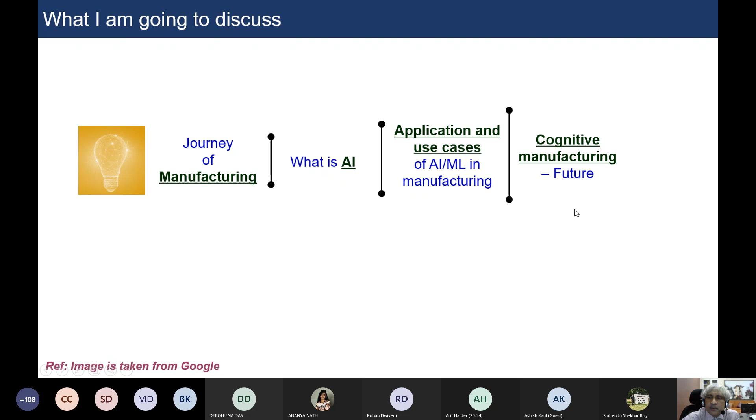I'll also discuss what Deboleena mentioned, the Center of Excellence in Advanced Manufacturing Technology, which is DHI sponsored, and it is an ecosystem between industry and academia. We have a large number of industries present in the Center of Excellence doing projects with us. So I'll also introduce the Center of Excellence in Advanced Manufacturing Technology and the research activities there.

When I describe the importance of AI/ML in manufacturing, I'll also talk about some use cases, since some of you are already doing projects on AI/ML algorithms or concepts. You'll find how those concepts can be implemented in the manufacturing domain. So briefly, this should create an awareness of AI/ML for manufacturing.

Now let us look into the journey of manufacturing. Manufacturing started long back in the prehistoric era, in the Stone Age. At that time, people used to use stone as the cutting tool, and stone was used for different purposes.

So they got the idea what should be the shape of the stone and how that stone could be used for different purposes. During that period, people used stone as the cutting tool.

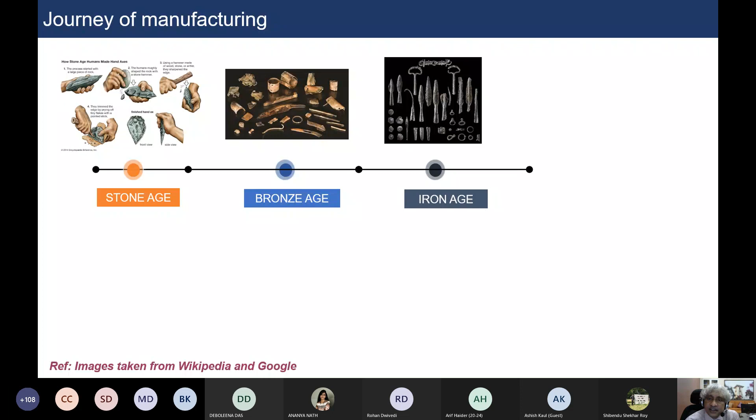Then came the machine age, where different types of motion and directions of motion were achieved through mechanisms. Then people thought about how to run those mechanisms and what should power them, and with that, the advent of steam, Industry 1.0 came up.

Then, with the use of electricity in the manufacturing shop floor, Industry 2.0 came up, followed by Industry 3.0, and then Industry 4.0 came up.

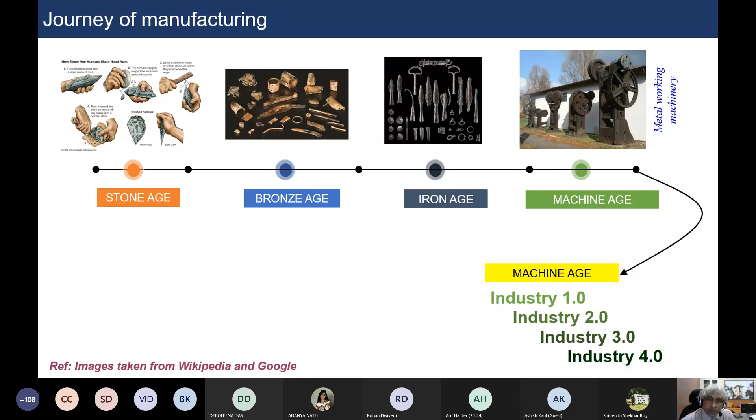Let's quickly look into what Industry 1.0, 2.0, 3.0, and 4.0 are. As I mentioned, when steam got used to power mechanisms, manufacturing became a bit easier compared to the machine age.

But steam had its own problem - steam cannot be transported from one location to another. It's very difficult, so manufacturing remained very much localized.

Then with the advent of electric energy, electricity could be transported from one location to another, and the same type of job could be produced at different locations. That means a company could have one unit at Durgapur and another at Kharagpur, simultaneously producing the same type of jobs through the supply of electricity. So mass production was very useful in the era of Industry 2.0.

In Industry 3.0, we find a lot of usage of computers and robots. Automation was very much present in Industry 3.0.

But even though automation, robots, and computers were there, it didn't flourish much because the cost of the computer was very high. The robot was also highly programmed and its cost was also very high, so this automation didn't flourish the way people wanted.

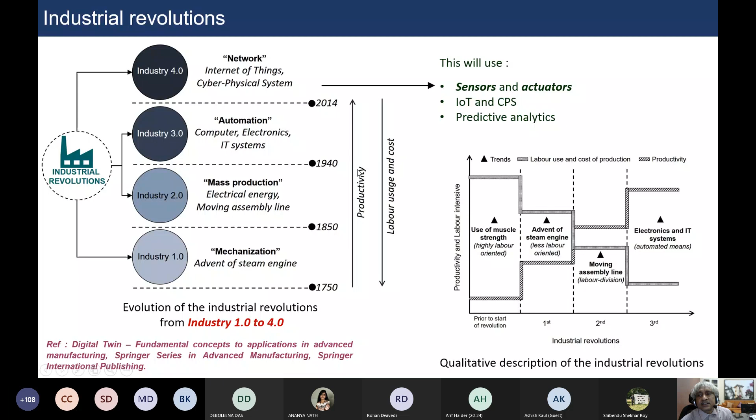So the productivity is increasing, labor usage is going down, and the cost of the product is also going down as we move from Industry 1.0 to 2.0 to 3.0 to 4.0. As productivity increases, labor use is coming down - whether that's good or bad can be discussed and debated later. And the cost of production is also going down.

Now let us quickly look - since this is manufacturing, and I understand a large number of participants are in the field of mechanical and manufacturing, but it doesn't matter even if you are not in manufacturing. These examples are very lucid, one can very easily perceive and understand.

If you look into this foot-driven machining operation, that means the mechanism was powered by human labor - powered by human foot. Because of this simple mechanism, you can rotate the job, move the cutting tool over the job, and remove the excess material to give a definite shape.

But it was purely human powered and purely human labor. That means it was giving some advantages over the previous era, but it also had some difficulties. If you want to machine a heavy material, that was not possible - it was posing difficulty. Metal cutting was not possible because you need to exert more force, and the accuracy of the product - if you go for repeatability, or want to produce the same type of product - that was also very difficult using this mechanism.

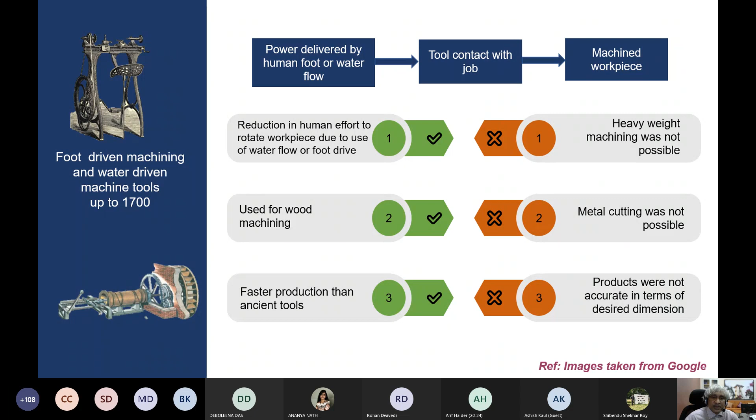Then steam was used - because of steam, we can rotate the job much faster, meaning you can remove more material. Productivity got increased. But again at this stage, it was very difficult to produce complex geometry, because the removal of excess material from the blank is purely governed by human labor.

Then with electricity, as I mentioned, easy transportation meant productivity increases, but it was not fully automated. The human labor was still very much needed - what should be the tool movement, how much depth the tool has to have to remove the excess material. All these things are governed by human labor.

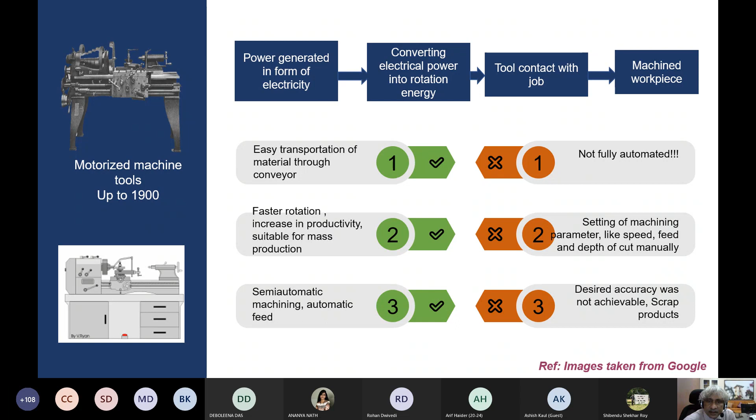Then the concept of NC or CNC - numerical control or computerized numerical control - came up. This concept gave a lot of hope towards repeatability, because the execution of operations - how the tool should move, what should be its speed, how the job should rotate - all these things can be done through programming.

Before you execute the job, you can do the programming. You can also visualize what sort of job is going to be produced. So repeatability, which was a major concern previously, now got solved. That means productivity also increases.

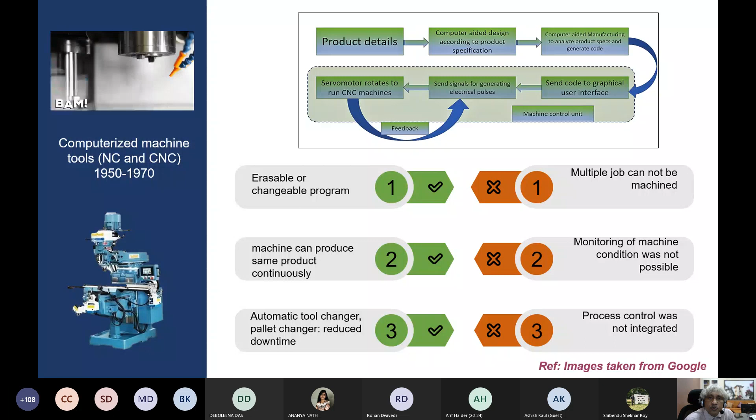But today, even having so many advanced CNC machines, it is not fully autonomous. Even doing multiple types of jobs at the same time is becoming very difficult. We need to understand that when a job is being produced, we have to acquire information out of that system - like what is the condition of the cutting tool, what surface roughness it is producing. So constantly you have to acquire information out of that system.

Today we are standing at an era like Industry 4.0, where a large number of sensors can be integrated onto the system. When I talk about the system, I include the machine, and it also includes the process it is executing - that means what is the surface roughness, what is the condition of the cutting tool, how much vibration we are experiencing because of a new process parameter, what is the power consumption.

So lots of information you are going to get. When you have too many pieces of information, that means you are going to have more and better insight about the problem. When you have better insight, you can do optimization and make proper utilization of the machine or system. You get to know how the system is behaving, how the machine is behaving, and accordingly you can predict what would be its remaining useful life.

Every stage we have discussed, from the Stone Age to Bronze Age to Iron Age to Machine Age to Industry 1.0, 2.0, 3.0, and 4.0, the concern was to increase productivity, have more accuracy, precision, and consistency in quality, and low production cost. Because in manufacturing, the product has to be cheaper, the process has to be faster, and the product has to be better.

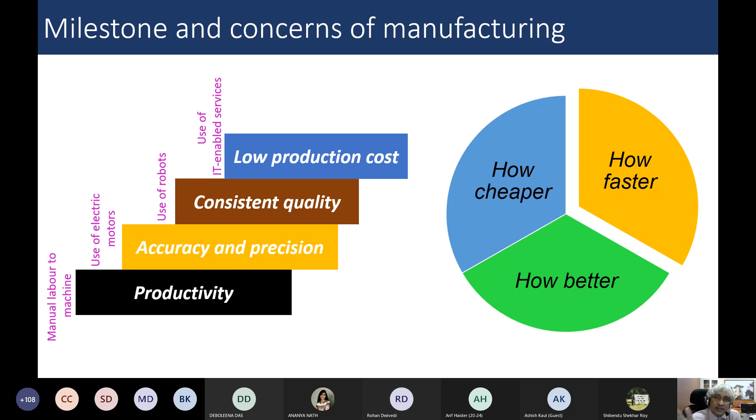That's why the fourth revolution gives us hope that because of the attributes of the modules of Industry 4.0, we can have a better day tomorrow. A lot of modules are there—I'm not going to discuss all of them, and I'm sure you've heard terms like cloud computing, cyber physical systems, big data, simulation, Internet of Things, augmented reality, robotics, additive manufacturing, cyber security, and system integration. Here there are 10 modules.

Some people claim there are 9 modules, since some of the modules are split over here. Some comment that Industry 4.0 is just a flashy catchphrase, but I don't think in that way.

If you are really able to implement these concepts in the manufacturing domain, you will have a complete see-through understanding of the system. Once you have that, as I mentioned, you can make products smarter—something is going to happen with this product, something is happening in the market. If the market demand changes, how can I quickly adapt myself to produce a different job and meet that market demand?

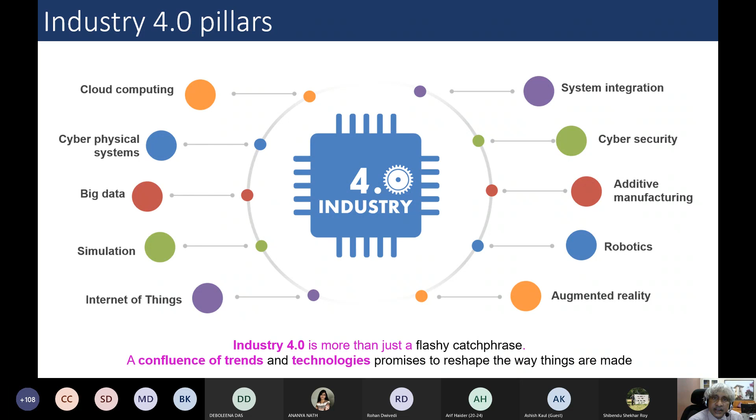The robot is very much needed for this automation. If you look at the usage of labor, it has very high flexibility—if an unforeseen situation comes up, the human brain is supreme. Human behavior and the brain can solve unforeseen situations, but human labor has limited productivity.

Then people thought of completely replacing human labor with robots—you can have higher productivity, but it will have limited flexibility, because today the robot is not capable of tackling unforeseen situations. It can identify the best solution, but if something happens while executing that solution or algorithm, it is very difficult to apply human cognizance.

That's why people are thinking we must use the robot, but in conjunction with human labor or the operator. In this way, flexibility comes from the human mind, and productivity comes from the repeated, untiring working of the robots over a longer time.

If you look at manual operation: less productivity, higher rejection, and human involved. For the industrial robot: high productivity but no intelligence—it is programmed, so it executes that program repeatedly in a nice way, but if something unexpected happens, it doesn't know how to solve it. So there's no human involvement, and if human intervention is introduced, production will stop.

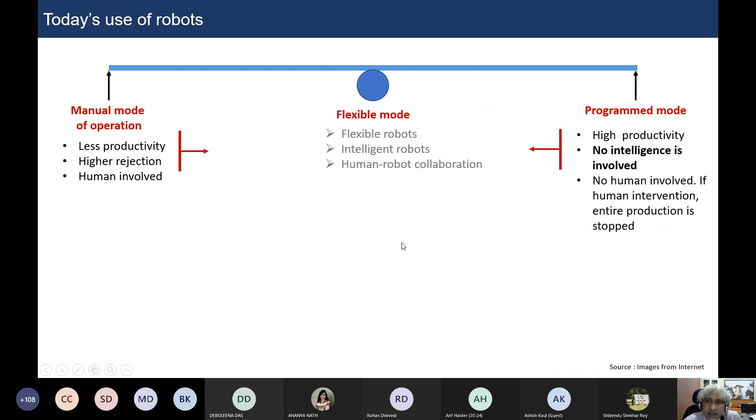So the balance is a flexible mode, where the presence of the human being should be there along with robotic use—robots should work in conjunction with the human being. In that way, it gives you the true sense of collaboration.

Now people also talk about collaboration—robot to robot collaboration and robot to human collaboration. For all these collaborations, we must understand how the collaboration would be, whether it would be in the form of coexistence, where both the human and robot share the same workspace but do not interact.

I'm giving an example. I've also given these examples in the same course, a course on AI for manufacturing at IIT Kharagpur.

Think of a relation between a supervisor and a doctoral scholar. If a scholar is working in the lab and the supervisor is there, but the scholar doesn't interact with the supervisor, and the supervisor also doesn't know what the scholar is doing, they are working in the same lab but not interacting. This is called coexistence.

Now, the scholar is somehow afraid of the supervisor, and the supervisor also doesn't like that scholar. So when the supervisor is going, the scholar is not there, and when the scholar is going, the supervisor is not there. This is called synchronization—they are working in the same environment, but at different time frames.

An ideal scholar-supervisor relationship is one having true collaboration, meaning both the scholar and the supervisor are working together at the same time, in the same space, sharing that knowledge and sharing their duties and work.

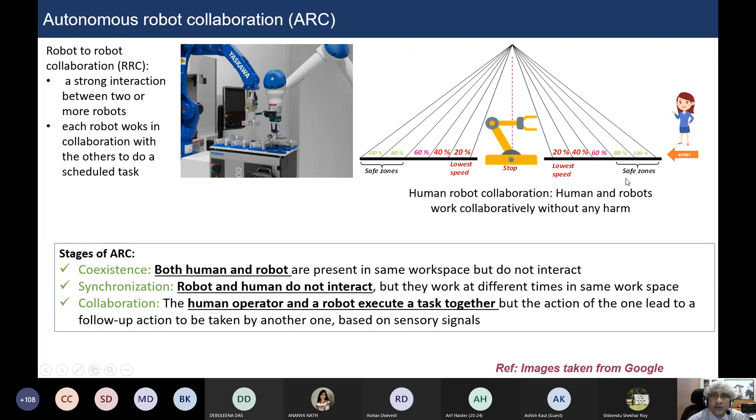But if we can solve these problems, there will be a lot of advantages in the manufacturing domain. I'm giving you some examples—you all know, you've seen on YouTube, in movies and elsewhere.

Some examples of autonomous robotic collaboration show, for different applications, the usage of image processing, and the usage of different machine learning or deep learning algorithms—how the two systems can work together and how they can solve unforeseen situations.

Another concept is coming up—well, it's not really new, it's very much there in the era of Industry 4.0, where we have so much implementation of IoT, the Internet of Things. Different types of commodities are connected to the internet, sharing data—we call this the Industrial Internet of Things, IIoT. We also use the concepts of big data, cloud computing, simulations, and everything.

So why can't we create a twin of the system? Can we not create the exact replica of physical systems? We all know in the case of biological twins, when a fertilized egg splits into two cells, they have the same DNA code—meaning they are not only looking the same, their characteristics are also the same. There are lots of examples of identical twins.

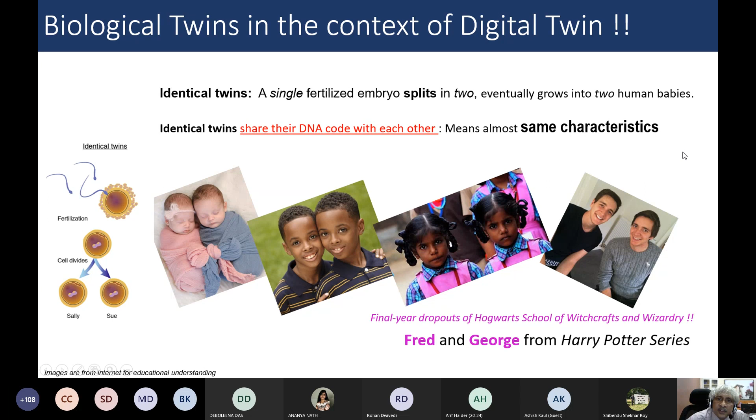The question coming up in the manufacturing domain is: can we create identical twins of the physical system, which we call the digital twin, having the same characteristics? This means if we have a real space—a physical asset, which could be a machine or a component, or a shop floor where, along with the machine, we also have the presence of the human being.

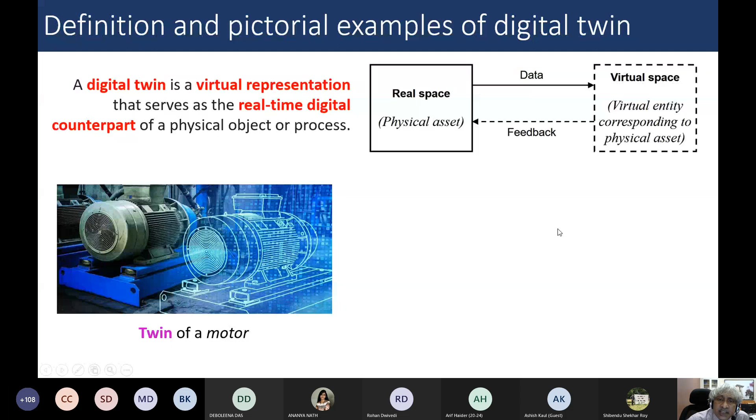If we can constantly acquire the data, we can create a virtual model in different forms—it could be a data-driven model, a physics-based model, or a combination of both, which we call a hybrid model. So it's the constant acquisition of data from the physical systems and developing an AI/ML model for predicting the system's behavior.

Here is an example of a twin of a motor. We have a physical system, and we have created a virtual motor. It not only looks the same as the physical motor, the functionality is also portrayed—meaning inside the motor there are several components, and how those components operate when the process parameters are changed.

Every phenomena is getting portrayed or predicted in the virtual model. In that case, you can come up with some unforeseen situation. Let's say the motor was running at 1800 RPM, and I would like to run the motor at 3000 RPM to see how much temperature is getting generated inside the motor, how much vibration it is producing, and whether the bearings are okay or not.

I cannot do it on the physical system, because if I do it, it may fail. If it fails, that means there will be a breakdown in the system. So if I want to optimize the process, I need to do a lot of experimentation on physical systems, which is very costly, and sometimes it brings catastrophe into the system.

So if I can create an absolute identical virtual representation of the physical system, then I can get the behavior of the physical system in real time, and that is called the digital twin. The digital twin works not only on real-time data, the present data, but also on past, historic data. Based on the combination of historic information and present day status, the machine performance can be predicted for the future.

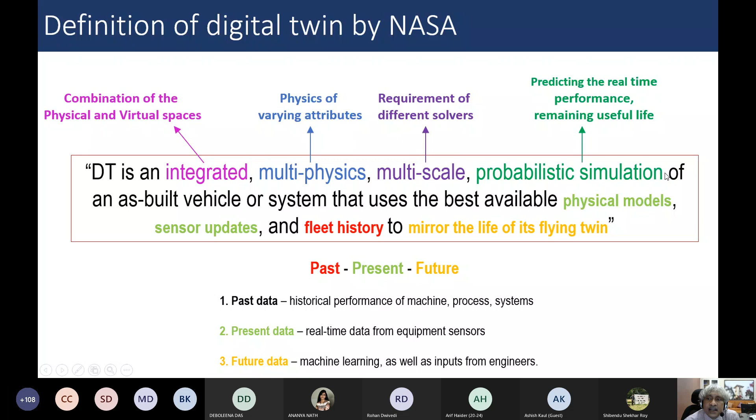So having all these bulleted questions answered, you can have a very good simulation of the physical system, which will then be able to predict the remaining useful life of the motor.

So I'm giving an example of the digital twin for the CNC machine. Let's say you do have a physical system where I have engaged different types of sensors: force, speed, position, temperature, vibration, and current. We can have these sensors engaged at different locations, and we can have some information.

You can also develop the ML models. You can predict the job quality based on this. You can predict what is the condition of the cutting tool. But it's very difficult to predict what is the wear model inside the gears inside the motors.

It's very difficult to predict how much heat is getting generated at the different components, how much vibration is getting generated at the individual level, because placing the vibration sensor at different locations is not an easy job. Sometimes it is not possible as well. You can have the overall gross vibration, but checking the vibration at each and every point is very difficult.

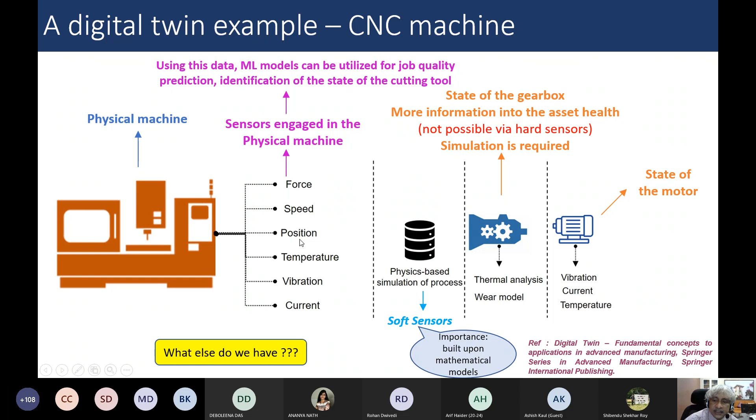You can also identify or simulate the state of the motor well if we are having both the data-driven model and the physics-based model.

So the benefits of the digital twin is that it is constantly monitoring the physical system, and based on the data you are evaluating, you are doing the optimization of the process parameters. Based on these three important features, you can also do the risk management.

So I have given an example that if a motor is scheduled to run only at 1800 RPM, what would be the fate of the motor if I make it run at 3000 RPM?

So whether some problem would be there or not - these things can be very easily identified or deciphered if I develop a digital twin model. And on top of that, you can give training. So that's why the digital twin of the physical system - if you would like to give training on the CNC machine, you create a digital twin and give the training.

to the person who is sitting at a remote place. That means if I can create a proper digital twin at IIT Kharagpur on the CNC machine, you all can have the performance of the CNC machine itself and see what type of job it is producing, sitting at Durgapur. So if you analyze and apply your common sense to these 3 points - monitoring, evaluation, optimization - then you'll get to know that you are going to have a proper judgment of the equipment.

So, what was my health condition previously, what is my health condition today? If we know all the prehistoric data, historic data, and today's present data, you get to know at least an idea of what would be my health condition tomorrow. So productivity can also be improved, you can reduce the risk, and maintenance cost can also be reduced because the breakdown phenomena can also be predicted. So a lot of advantages are there by developing the digital twin.

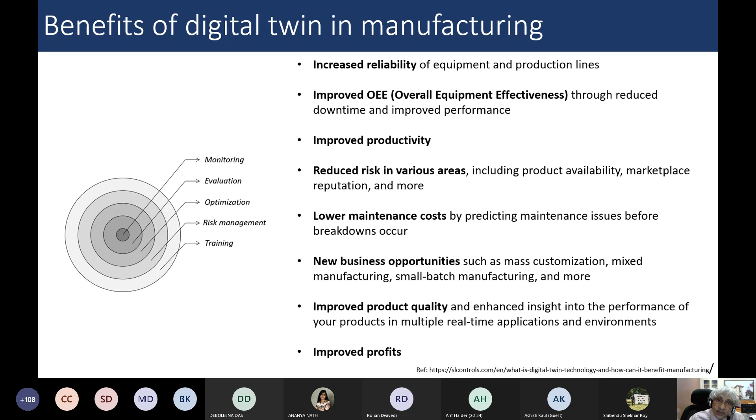So the other aspect is cloud computing of Industry 4.0, because a large number of sensors are used on the machine, on a single machine. But think of that - you'd like to have the complete picture of the shop floor. Different types of machines are there. Performance of one machine influences the activity of the next machine. So that means data has to be transferred from one machine to the other machine.

Not only the machine, but other utilities of other units should be there. The human presence of the operator will also be there - how do the operators interact? So collecting information from different locations is very much needed. It's a huge volume of data, and you need to process the data in real time. So you have to keep on harping on the cloud computing concept, or the fog computing concept, or the edge computing concept. We have done some case studies on edge computing and cloud computing as well.

As I mentioned, a large number of data is coming up, and of course the data is not all the same type. That means some is sensor data, structured data; some is optical images, unstructured data. Some data would be in the form of an email, some in the form of a PDF. So different types of data, different volumes of data, different speeds at which data is coming across - from the operator, to the machine - and on top of that, what is the authenticity of the data? That means uncertainty of the data. So these 4 V's play an important role in manufacturing, in Industry 4.0, when you tackle the manufacturing aspects.

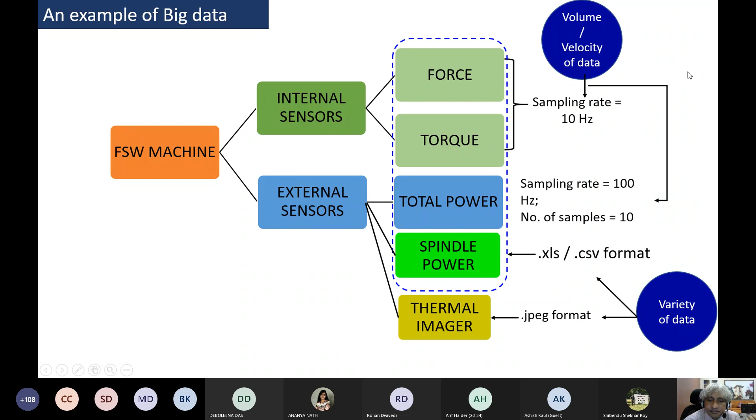I've mentioned that different types of sensors are needed, the soft sensors and the hard sensors. The sensors I've mentioned, like force, torque, power, speed, these are giving you direct information from the system itself, so they are hard sensors. At the same time, the hard sensors are not sufficient enough, so you need to do simulations.

The simulation model will give you the soft sensing. So how to come up with the hybrid knowledge to have the proper understanding, so that you can make the reasoning, which is very crucial, because reasoning is lacking today in the artificial intelligence model, and that's why people are thinking about cognitive approaches and all.

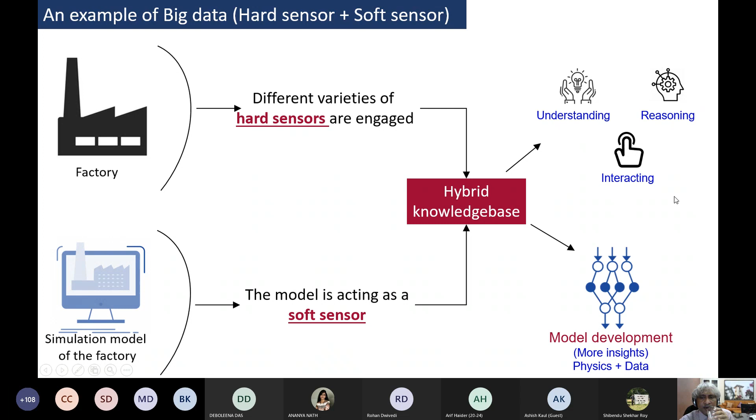So we did some work on the hybrid model of the digital twin, which is based on sensor data as well as simulation data. Real-time sensor data is collected, and the process is also simulated. So we know the stress strain at each and every point inside the material during the execution of the work. At the same time, we know the overall force variance and the power consumption.

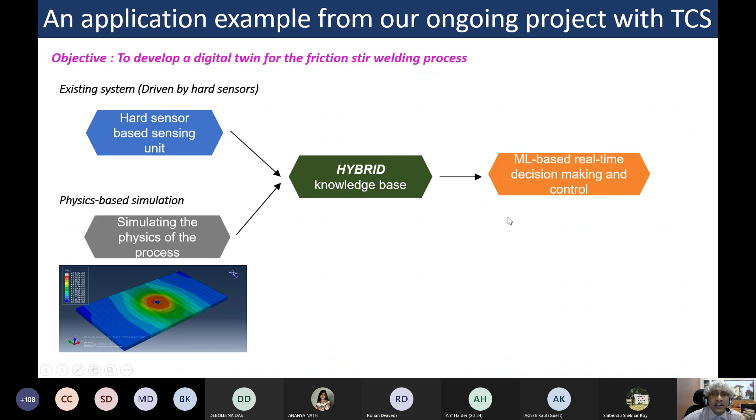So the simulation model and the sensing model are clubbed together to give you the hybrid knowledge base, and that knowledge base is used for prediction purposes using different types of AI, ML, DL models. This we have done with Tata Consultancy Services, and it's about to be filed as a patent.

Now, when you talk about automation today, where we stand and what we need, we find that we are really lacking intelligence. The system that we have so far, the robots in Industry 3.0, they were highly programmed, meaning they can execute the same operation repeatedly using the PLC and a few sensors.

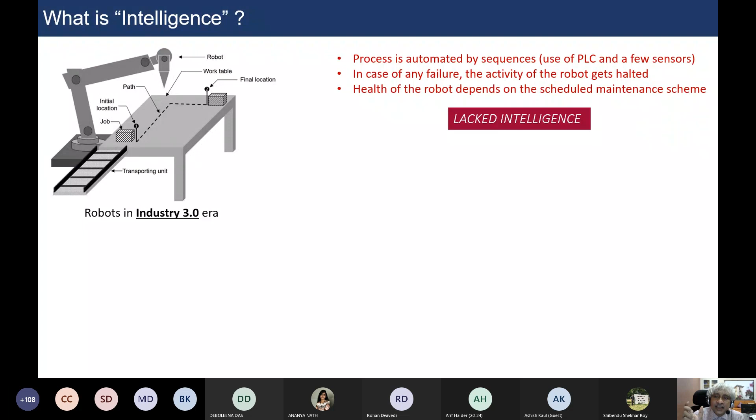But it doesn't know how, if any failure comes up, the entire shop floor activity can be optimized. So that's the real concern, and that's why I call today's automation really lacking the intelligence level. So in order to make the system intelligent, data has to be constantly acquired, analyzed, processed, and predicted.

I'm giving an example: a robot is working to pick up a job from one place and is scheduled to place the job in another location. But if some obstacles come up dynamically, how are you going to solve that? How should the robot find different possible paths and finally reach the destination?

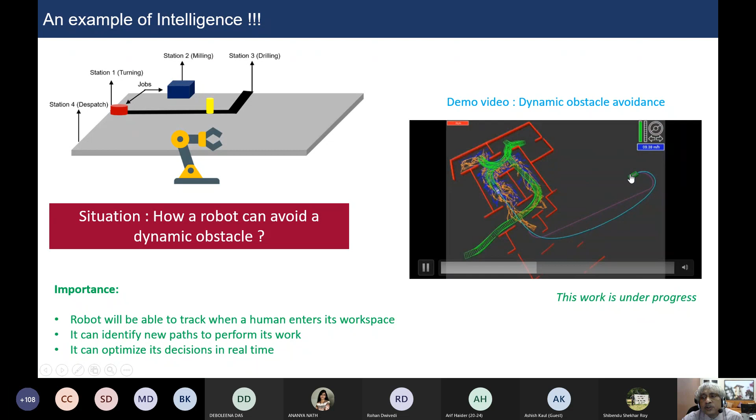We have done some work on this aspect, dynamic obstacle avoidance. It has been successfully simulated, finding different possible paths, and from there coming up with the shortest path, and reaching the destination.

But if you look into present-day artificial intelligence and compare it with human intelligence, we human beings do have different sensors. We get information through the sensors, and then that information is processed in the brain, and that's why we can encounter unforeseen situations.

But if we think about today's AI model, we are also using different types of sensors, capturing information, developing the AI model trying to mimic the human brain, but still we are unable to tackle unforeseen situations.

What this means is that the models we are developing, the artificial intelligence models, are not able to capture the complete behavior of a human being. So in a completely new situation, how the human being will operate, or what sort of reasoning the human being will be able to gauge, that is not possible today by the AI method.

I'll give you an example. Like if there is a party going on and a lot of kids are there, and cake cutting is going on, and all the kids are wearing caps, balloons are there, everything is there - it's just like a birthday party.

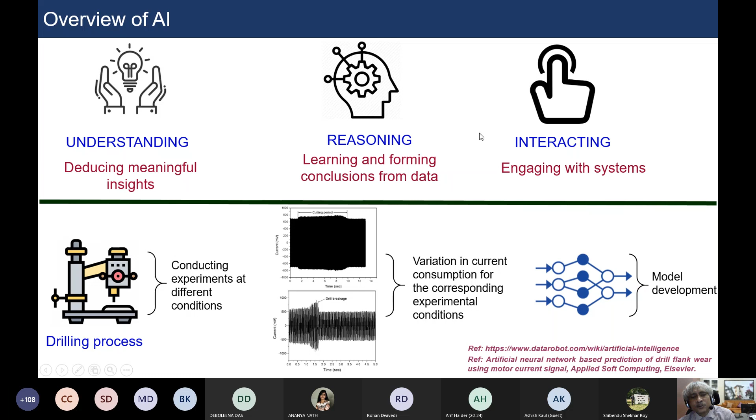I'm not going into the manufacturing model itself since that has already been explained. There's a need for whatever AI we have to be easily deployed in different manufacturing domains. We searched a lot at our Center of Excellence, where we have a large number of doctoral scholars and interns from different institutes, including NIT Durgapur. We identify different types of industrial problems and see how those problems can be solved.

We are not developers of AI/ML models. We just make use of AI/ML models, making small changes in the algorithms, but we'd like to use those algorithms effectively so we can reach the industry. That's the purpose of our Center of Excellence.

We found that AI can be easily implemented in quality inspections and machine vision systems. It can be used for predictive maintenance, and for coming up with possible alternative designs of your product - meaning you can generate new designs. You can create a complete digital replica of the physical system, that is, digital twins. You can also make robots autonomous by putting a little cognizance into robotic behavior.

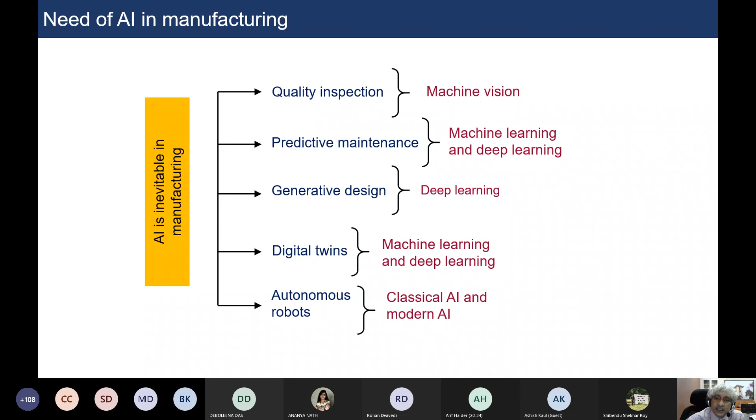We can also gauge handwriting, what has been written and so on. So natural language processing, NLP, has also been very useful.

We can also find out the human ability to see and analyze. I do not know how much analysis is possible apart from the gross information that is visible on images, but that much analysis we can achieve.

If we are given two look-alike products, almost the same, you can identify they are look-alike, but there is a slight difference in the dimensions of these two products. We are presently working on such problems for Tata Motors and others. It's very interesting that all dimensions are the same, but there's a subtle difference. So you need to identify that region, focus on it, apply the AI model, and then find out how much the difference is.

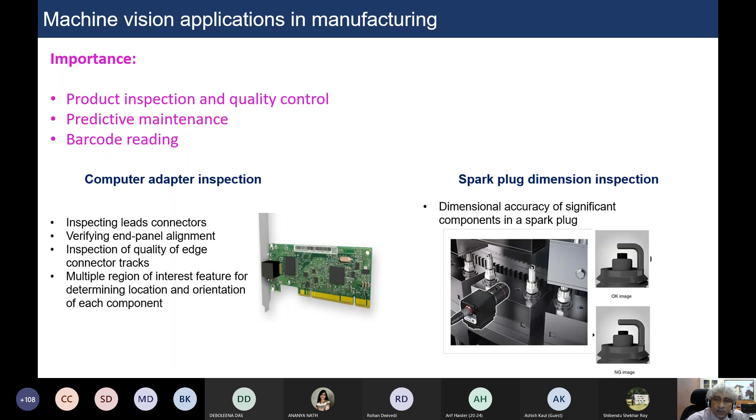Another model I'm going to present is by Sukriti, a friend from NIT Durgapur. She is working with us on identifying the fuse box in an automobile car. Each and every car has a definite fuse box. So from the fuse box, can I identify which car it is? Can I identify what sort of fuses are in place?

How many fuses are there? Whether the proper fuse has been placed at the proper location, and all.

She has worked since March with us on different deep learning methods, and I'm told that today the accuracy is 100% using the YOLO model. That means this model can now be very easily deployable for the automobile industry.

So now we'll reach out to the industries. She is also preparing a proper graphical user interface so that industry people can use the demo version. A lot of other features can be very easily identified during the assembly operation.

Now whatever is there is fine, we should be happy with that. But still I would say that today's scenario is that it's very much weak. The artificial intelligence is very much weak.

If you look into computer games, the AlphaGo - it's a board game, and the AlphaGo is a computer program. That means it has been made by human beings, and now it can defeat human beings. The higher version is AlphaZero.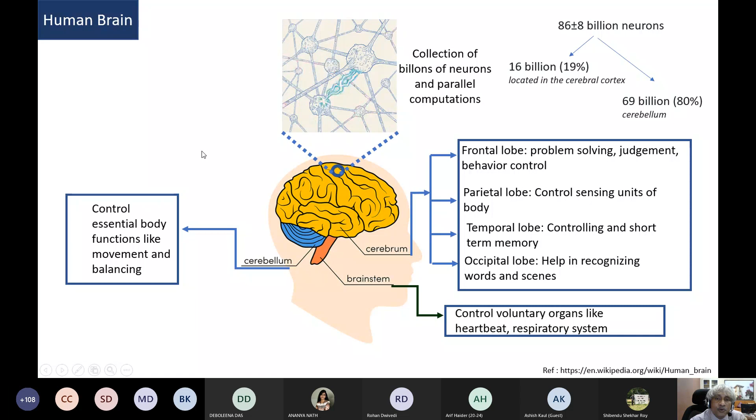Human beings have a large number of neurons, and each neuron is connected to other neurons - a lot of connectivity is there. That means sharing information and parallel processing is very much possible in the human brain. So the frontal lobe can interact with the operations of the parietal lobe, the temporal lobe, and the occipital lobe, and get to know a very good model which can tackle unforeseen situations.

This is also very interesting. I was reading one paper on brain science and AI, and I found that this information would be useful. That's why I copied it from there.

You see, we are neuroscience people. Neuroscience, computer science, and the cognitive domain - they should work very much together. Human behavior, human brain, and the algorithm developer - computer science must work with cognitive science people, must work with neuroscience people, so that the models developed can be deployed by manufacturing people into various domains. Then only can we dream of building a machine which can think like a human being.

If the brain's different regions can be examined - people have examined them using microscopes - that gave the neural connectivity. Then the artificial neural network model was developed by computer science people, and today we are using that artificial neural network model for various types of process monitoring.

You can use the electronic detector. The convolution architecture, deep architecture, is revealed now. So CNN has been developed, mimicking the convolution architecture or deep architecture of the human brain, and that is having a strong presence in image analysis or quality assurance.

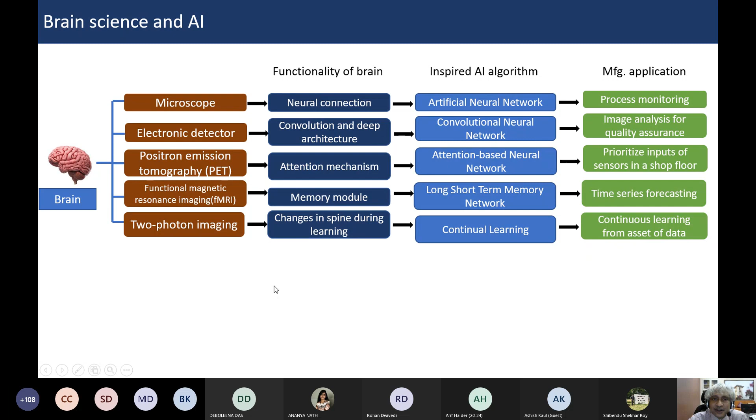A lot of explorations have to be made on the brain structure. We have just revealed a tiny part of the brain. That's why if we can have a complete understanding...

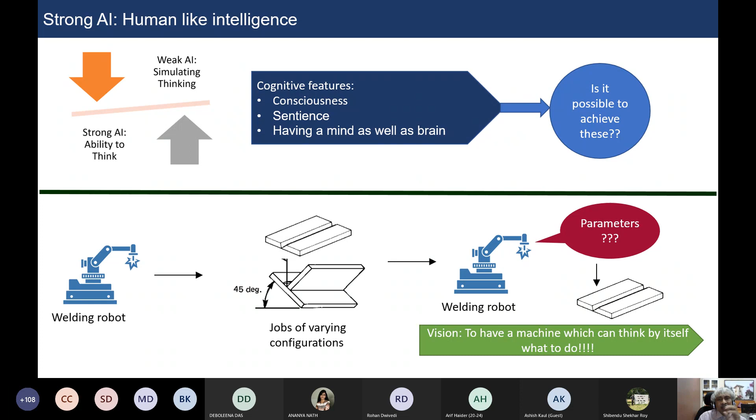Involving cognitive features like consciousness, like sentience, emotion - if you can club both the mind, that is the behavior, and also the brain, its computational aspects - if you can merge both together, then there is hope of building a machine behaving like a human being.

The present scenario is that AI-based object recognition and material handling is very much possible, but we are not very much smart as of now to handle the collaborative aspects of the job. Machine health prediction is possible, but self-learning is not there. If something is happening, the machine is unable to learn out of that system. So toolpath optimization and all these things are possible, but a lot of miles we need to travel in future so that we can do something towards cognitive intelligence.

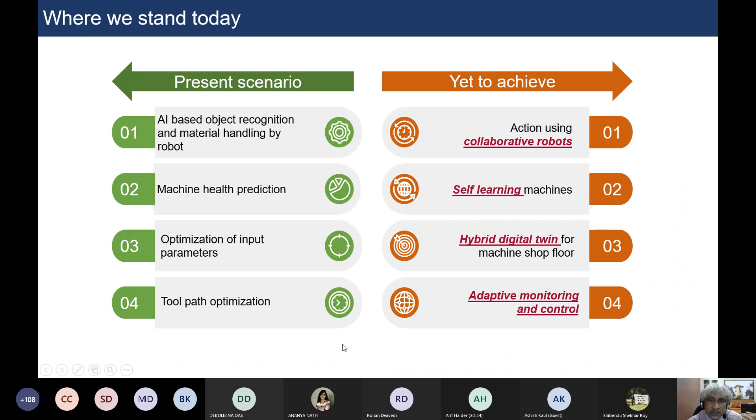I'll give you some examples of AI in manufacturing, quickly browse through, so it will give you some idea, because these are application cases we have after a tremendous survey. We identified every domain of manufacturing, starting from casting, forming, machining, welding, additive manufacturing, and the overall complete manufacturing feature which is the supply chain.

And everywhere we find there is tremendous scope of AI in machining. You can monitor the real-time state of the cutting tool, because if you can monitor the health of the cutting tool, then you can ensure job quality. You can also monitor the health of the gears. If there is no missing teeth between the two mating gears, then you can ensure smooth power transmission and all. So the surface roughness of the product can also be identified.

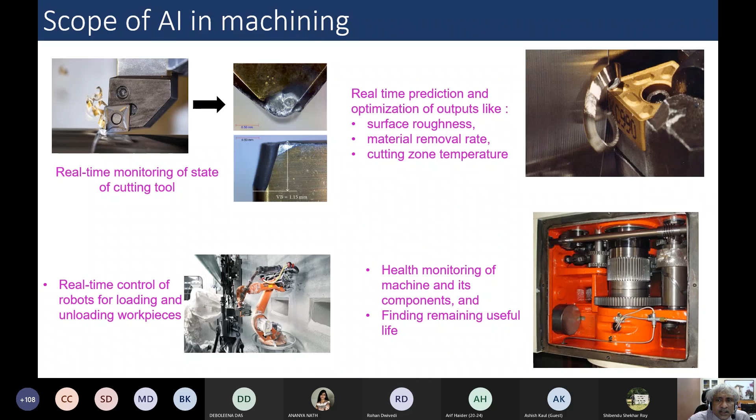The defect in the cast product can be very easily identified by using image processing and all, during the casting process itself, observing how the solidification is taking place. From that, if you can identify the solidification process and mimic it properly, then you can optimize the process parameters in real time to get rid of the defect.

We have done some similar work in the field of welding, for real-time defect control. I'll also show that one.

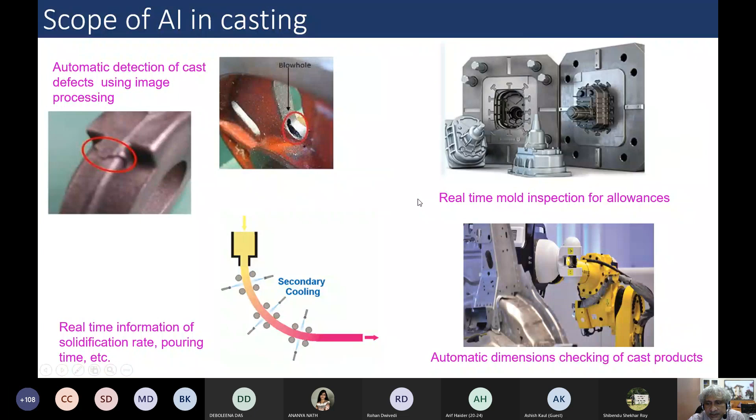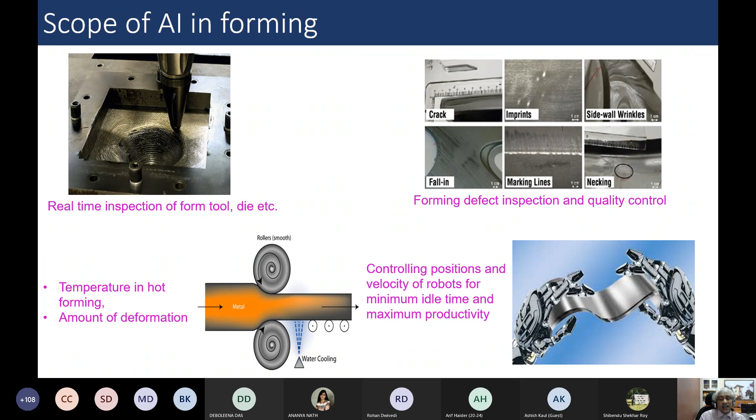Similarly, AI in forming - a lot of defects we do observe. In steel rolling, how the product is deformed by the counter-rotating rollers, and whether there is elastic deformation taking place on the roller or not. If the deformation takes place, then the job quality will not be properly ensured. Also, material handling concepts for two-product handling can be very easily solved by collaborative robots and all. So a lot of applications are there in the field of forming.

Similarly, for welding, you can find out the defect. You can also find out the seam, because seam tracking is a real concern for any industry, because when welding is getting done, there is a huge arc, and it's very difficult for the operator to check what is the weld line or the proper seam. So if AI can be engaged, proper image processing can be done so that the intensity of the arc can be reduced, and then the human operator can see the weld line properly, and welding can be done in a nice way.

As of now, in most cases - recently I visited one organization whose job is purely cutting and welding, and there is no automation. Every welding is getting done by the operator, mostly MIG welding process. How do they solve this? They solve it purely by muscle memory.

Muscle memory means you are not looking at the line - your hand movement has been done the same way for several times, even for months together. So the hand moves in the same path. Just like when you type, these days we don't look at the keyboard - our finger automatically goes to the proper place. That's called muscle memory. So the welding is getting done purely by the memory of the movement of the limb. But it may happen that sometimes that creates problems during welding.

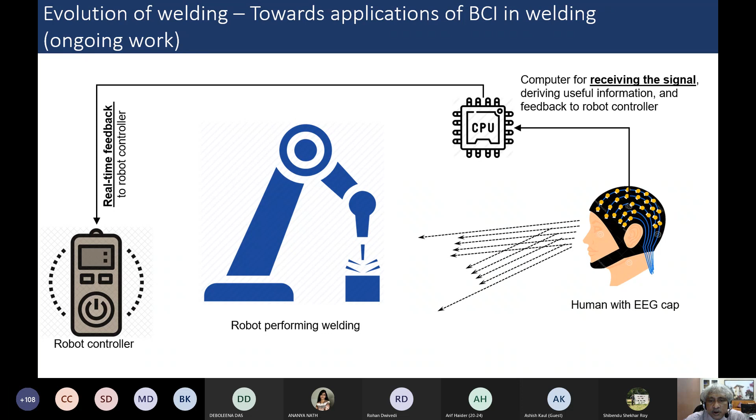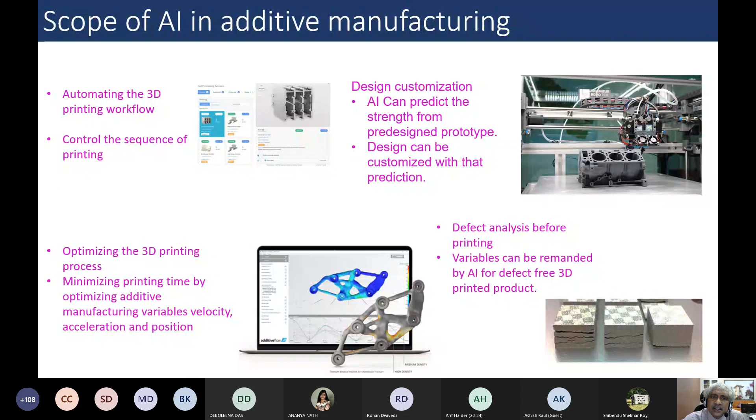So for additive manufacturing, I'm not going into the other areas of manufacturing. Any manufacturing process, be it casting, forming, additive manufacturing, even supply chain - there's a lot of scope for AI implementation.

I would stress a little bit on the supply chain, because when you talk about supply chain, that means starting from the inventory to the exit - not just exit from the shop floor, but until it reaches the customer's hand. All this information you can capture.

How much storage do you have? How much inventory do you have? Do you have the proper inventory to tackle the present operation? If all of a sudden some demand is coming up, whether your inventory would be sufficient or not. If one process fails, how can the information be transmitted to the next process, how can the entire activity flow be optimized because of the failure at one end?

So all these optimizations can be made very easily through artificial intelligence, starting from the product design to the customer's end.

Some use cases we would like to show, because we've been working for a long time on different aspects of manufacturing, and presently, not only us but large numbers of researchers throughout the globe are working on what today is called artificial intelligence, machine learning, deep learning and all. But in the 2004 era, before that, when people used to work on this, it was named soft computing.

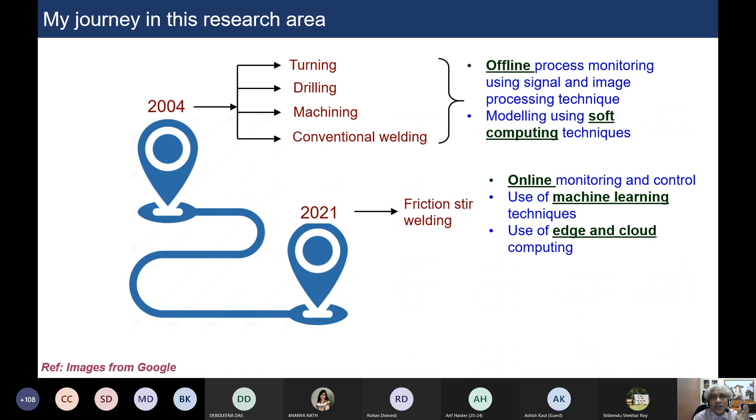Now, because of the advent of different activities portraying the brain's functions, more specifically deep learning algorithms like CNN and others, people are able to decipher more about that system. On top of that, previously the computer was not very accessible - computing power was very costly. So we could not solve, even though you have a large number of data, a large neural network structure, you cannot solve it if you have a large number of hidden layers.

Backpropagation neural network was there long back. It was a supervised learning method, and most methods are supervised learning. So today we are solving what previously we could not solve. That's why the process was restricted to simpler predictions, but the concept was very much there. That's why I call it old wine in a new bottle.

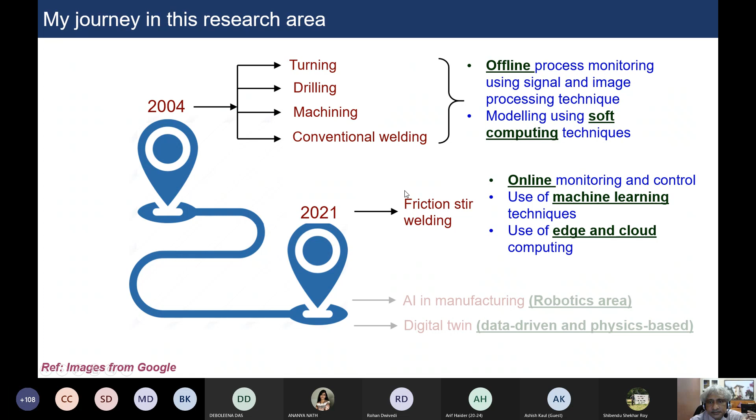So those informations will give you the quality of the weld. We captured the weld sound and did the signal processing—it's a pure time domain analysis. Kurtosis feature gave us a clear indication of how much blowhole is there, where the blowholes are, and where more deposition took place.

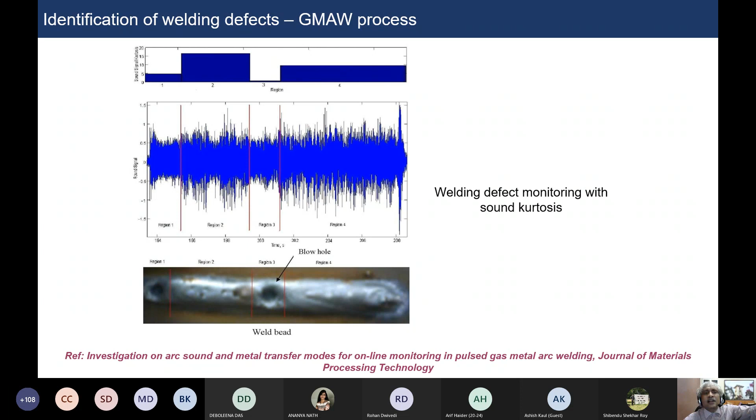But with all these algorithms, we could not give feedback to the machine, so it was an offline analysis. Even so, the analysis was strong enough that you could find out the grain size for different welding parameters. Now think about how manufacturing is so transdisciplinary, because if you can control the weld parameters, you are controlling the microstructure.

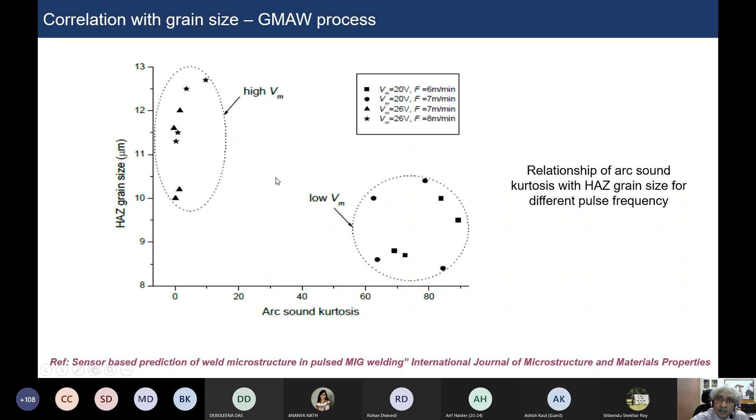That means metallurgical people are very much influenced by electrical people, and from this microstructure the ultimate strength of the product is defined, which is the concern of mechanical people. So the signal behavior feature gives a lot of information about the process characteristics.

But the concern is that you need to get the proper signal—you have to suppress the noise. The signal to noise ratio has to be very, very high. So all these features, all these things are there.

We have some real life case studies, most of which are filed as patents, where during the welding process we evaluate surface quality and change parameters in real time so that the product quality is improved. This is an example of not just real time monitoring, but real time control of the defect for friction stir welding.

That means if the welding process initially has some defect, the machine changes its parameters automatically and produces a sound weld. Now I must tell you that this information is purely based on sensor data—we have not simulated anything.

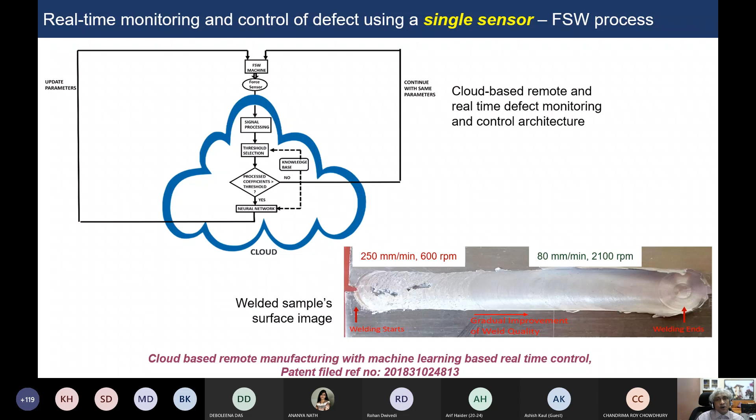Presently we are working, as I mentioned, on the hybrid digital twin with Tata Consultancy Services, where we are simulating internal features like the stress strain developed during welding. That information is clubbed with sensor data—force sensors, power sensors, and torque sensors—and then we can come up with a hybrid model to control these weld defects.

As I mentioned, we worked on defect analysis and correction in real time through image processing and other methods. If someone is interested, we can discuss this at length later on—you are most welcome to contact us.

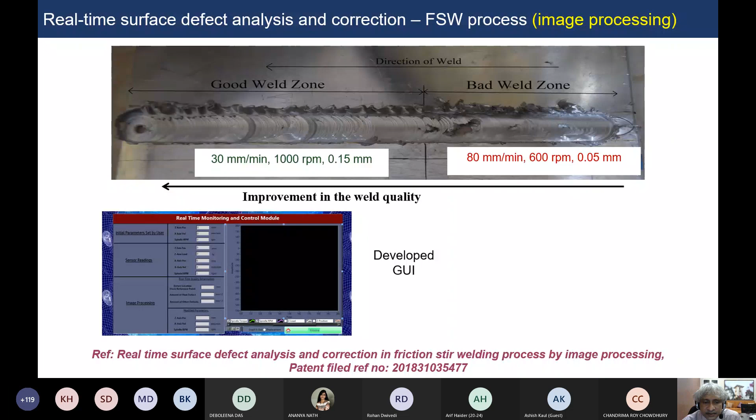So this is the present activity: how data is collected from the machine, how the ML model is created, how the decision is taken, and how we are creating the digital twin out of different components of the machine. In the friction stir welding process, we are collecting data constantly.

We analyze the data on the edge device, and if we find that the sensor's behavior or feature is deviating from the standard one, that means something is wrong. We send this information to the cloud, where another ML model runs to check how much deviation there is.

And to rectify that deviation, it determines what the process parameter should be. That information is given back to the edge device for a further check, to verify whether the prediction made by the ML model running in the cloud is proper or not. If it's a proper prediction, it passes through the limiter and is sent to the friction stir welding controller to run the machine in the prescribed format.

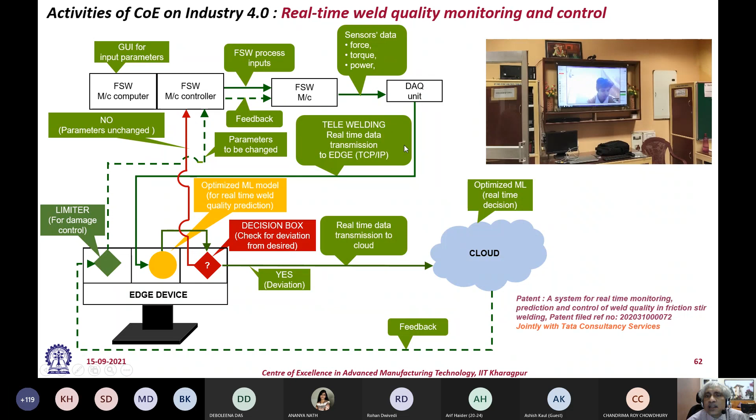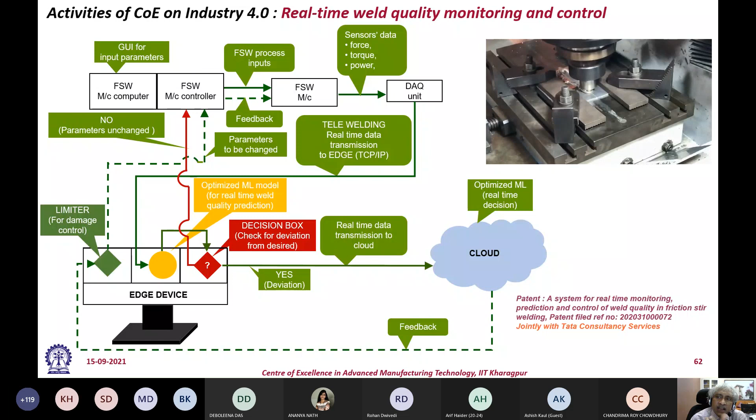Later on, you'll find that the spindle speed is rotating at a higher speed. You see a lot of cracks getting formed initially, a lot of defects coming up, and as RPM increased, the RPM became pretty fast and a defect-free product came up. We filed this as a patent, and it has given us a lot of visibility.

Now Tata Consultancy Services is looking forward to implementing this in their business model.

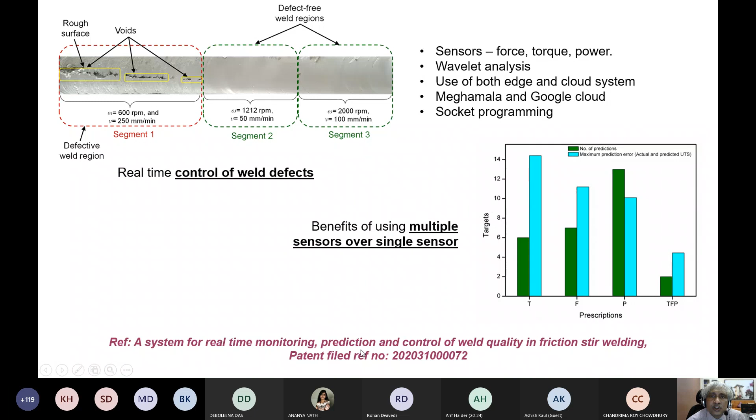So now we also worked on the big data concept - large number of data from different types of sensors - and we applied the AI/ML model. If the sensor data volume increases, the computational complexity will also increase, so there we need to do optimization, how to make it reasonably faster with gross increase in accuracy. This is low-cost based image processing, and it has given a lot of visibility to our center of excellence.

Now in case of industry, I understand some industry people are present here. When they produce the product, they just do sampling for the quality check. If you Google it, you'll find that for spot welding in automobiles, there's data from Audi that out of 1,000 cars, they only check one car for the quality of spot welds. That particular car is checked by a human being purely manually, all the spot welds made on the car. So that means 999 cars go unchecked even in a company like Audi.

So the large number of products goes unchecked. What the company wants is that every product has to be dimensionally accurate, so that it ensures high quality, and at the same time it has to have a high production rate. Now think of it - if the one car used for checking has something wrong, they are going to discard the entire 999 cars, and if it is accepted, the remaining are also accepted. That means a lot of products, even though stamped with the QC quality check green sticker, are not checked properly.

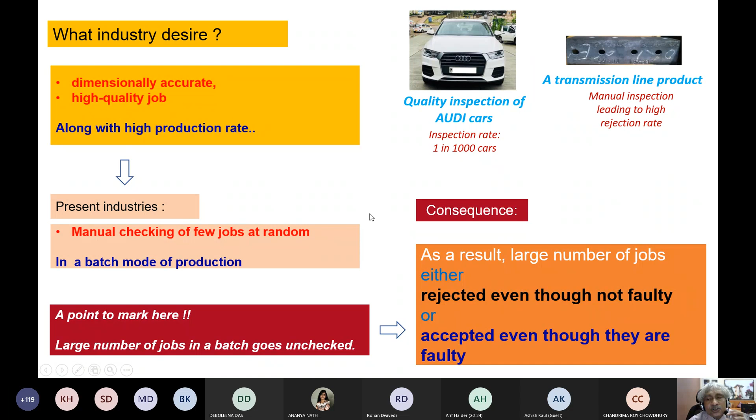So that means AI has got a strong role to check the dimensions of the product. The problem becomes very critical for MSMEs - micro, small and medium enterprises - because they do not have a quality department. If they cannot ensure their product quality, they can't be in the supply chain for big industries. Their quality has to be very good to compete in the global market, and in the Indian scenario, most MSMEs - that is the real concern, which is why they are unable to meet the global market.

So this problem was given to one of the MSMEs surrounding IIT Kharagpur, just before the lockdown, around 2nd or 3rd of February, and we did it in 1.5 months. We immediately contacted that MSME, but they didn't turn back. But we didn't stop - we thought let's go ahead with this solution. Since the product cost had to be very low, we used a webcam intentionally, to reduce infrastructural cost. And we know that by using AI methods, we can also augment image quality.

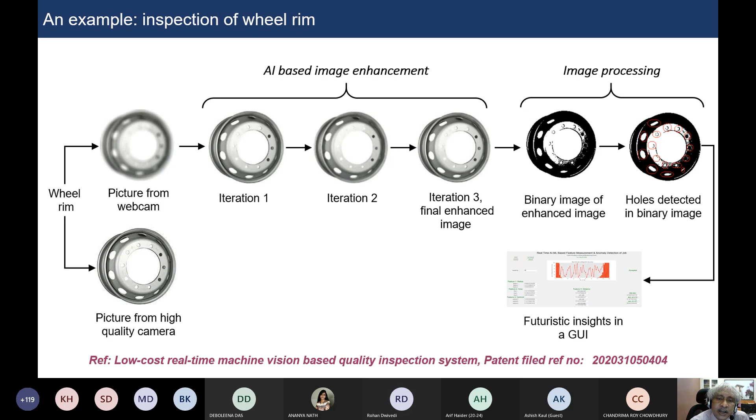So this is a wheel rim - the leftmost figure is taken by the webcam, you see the poor quality. Just below that is an image taken by a high quality camera. We worked on AI-based image augmentation, and after several iterations we got the image quality improved almost at par with the quality of the image taken by the very good camera. Then we did the processing and came up with a prediction that is 99% accurate.

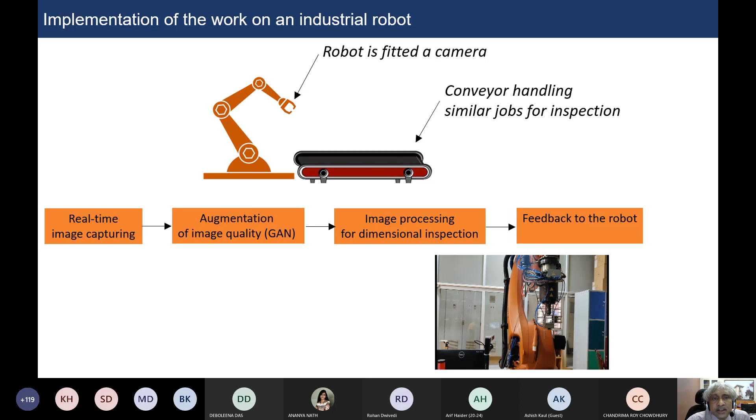I'll give you an example - this has also been filed as a patent, and it is giving a lot of visibility. This work was done by one of our interns, and based on this work, today we got a project for finding weld defects - AI-based weld defect analysis - from a very reputed government defense firm.

So you see, if products are placed and move from the conveyor belt - everything, the conveyor belt, is also fabricated by us - there is a webcam fitted onto the robot. The webcam captures the image, checks the quality, and the robot also checks the pose or orientation of the job, orients its gripper accordingly, and grips it. So a lot of ML is involved there, not only to check the product quality but also to orient the gripper to grip the object properly. This has also been filed as a patent.

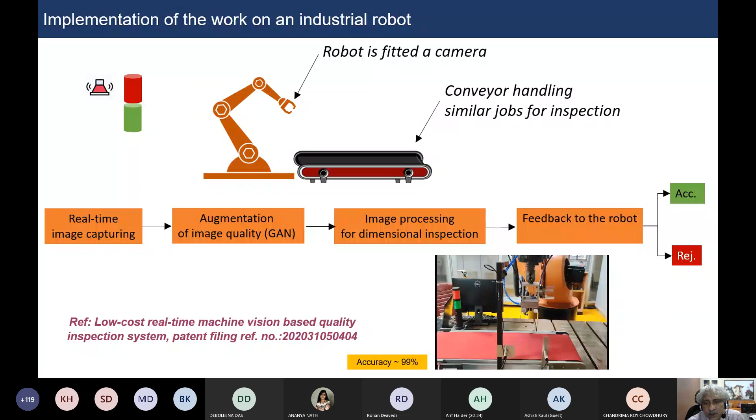This week we participated in an India-wide competition on India AI and became one of the top 3 innovators in the country for this work. We got that email today. It's giving very high accuracy. A lot of work is also done on different types of jobs, how to find the job dimension, what sort of job it is, and how to orient the gripper to grip it. We have got accuracy close to 97%.

You see our operator placing the job on the conveyor belt, and it's moving in real time. When it comes close to the robot, the robot camera's webcam captures this image and changes its orientation accordingly. It's a rectangular job. In some cases cylindrical jobs are also produced, so the robot gets to know what job is there. I think this is a cylindrical job, you see. Now the robot will change its gripper.

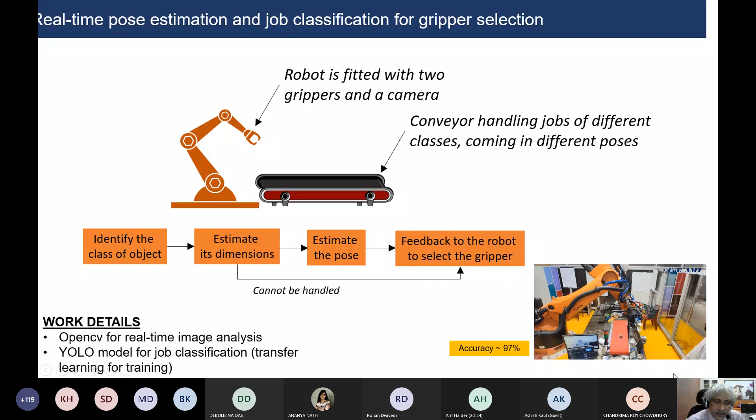This is our fixed sensor welding laboratory, industry scale welding. We have a large number of robotic facilities: MIG welding, TIG welding, spot welding. If someone is interested, you are most welcome. And then there is also obstacle avoidance, which I've already shown, how the obstacle can be avoided.

We are also developing the digital twin, but this digital twin is based on a data-driven model. That means what is the health of the electric motor, what is the condition of the bearings?

Okay, I think it's just noise.

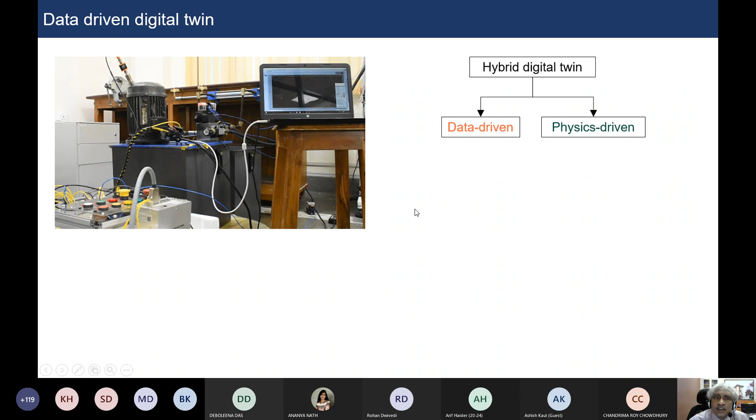So don't worry. The data which we are collecting from the electric motor, we are analyzing to check what is the bearing health of that motor. The health of the motor is decided based on different algorithms. In some cases we have got 100% accuracy based on the sensor data, power data, and vibration data.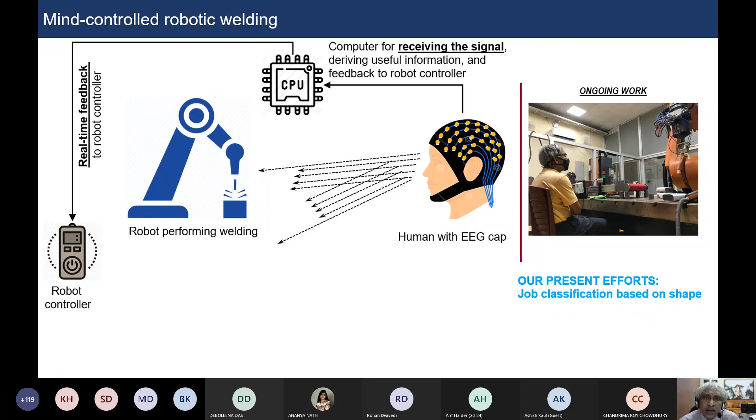As I mentioned, we are working on BCI applications. I'm sitting in my lab observing the job dimension and classification of the job. The robot understands from my thought whether I should use gripper 1 to pick the rectangular job, or gripper 2 to pick the cylindrical job.

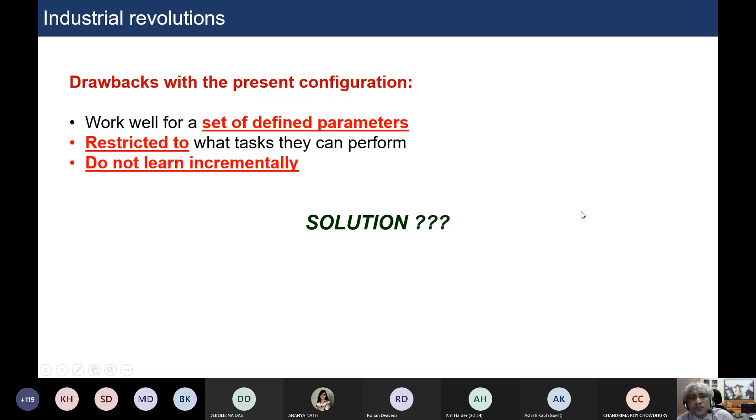As I mentioned, the drawback of the industrial revolution approach is that it works on a set of defined parameters, so it is very difficult—these days models do not learn incrementally. That's why people are thinking about cognitive manufacturing.

I've already given you a little introduction that every step has to be smarter: smarter control of the process, smarter product design, smarter supply chain management, smarter employee safety, smarter factory operations. When you want all these stages of manufacturing to be smarter, your intelligent model has to be very flexible.

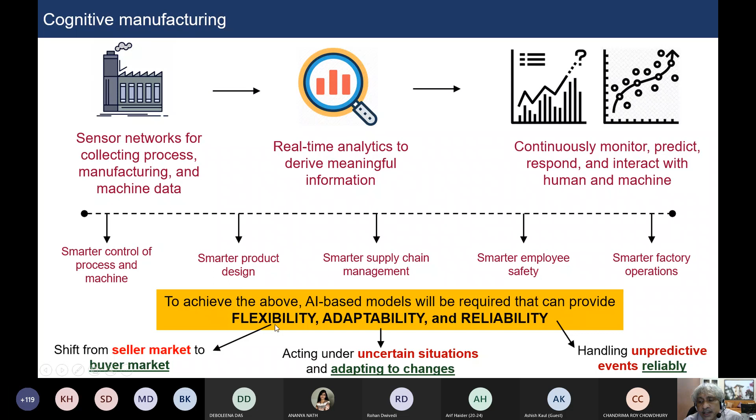Flexible means that if some change in demand takes place all of a sudden, I should be able to reconfigure the operation strategies to cope with the demand. It should also be able to tackle uncertainties. I should be able to know what the need of the customer is, and if the customer's need changes, what sort of changes do I need to make. At the same time we should be able to work reliably for unpredictable situations. That is called the cognitive architecture.

In the cognitive architecture, we collect sensor data. A normal AI model also collects sensor data and applies an ML model, fitting that model for the actuation of the work. But if a human being is supposed to work, the human will apply its own cognizance—trying to learn what is happening based on what has happened in the previous data.

It will try to reason why this is happening, and from there it will try to modify the model which is going to be used. So just mimicking human cognizance, if we can get the data and learn from it, that means during execution it is learning, and during execution it is also updating its model. That model is fed into the cognitive planner, and that planner can actuate the actions for the operations. So then only you can have better decisions.

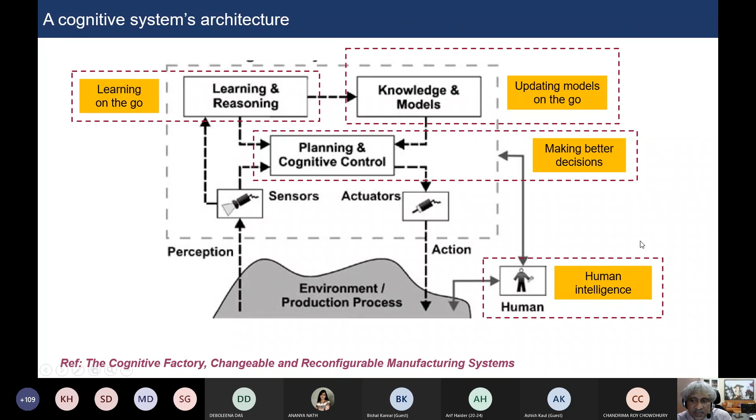I'll give you an example of how the cognitive model is different from the AI model. As a classification, the AI model tells you the best course of action, it can optimize and tell you the best solution, but it can't tell you what will be the condition if something happens. So the cognitive model can decide what would be the course of action during execution.

It can focus on reasoning and understanding the way people think. So that understanding is fed into the intelligent model. Then you can have a human-like intelligent model.

The cognitive language technologies use statistical techniques, but also make use of the verbal situation, or the information which we pass on during conversation, or if something is written on the board, or available in a PDF file. That knowledge has to be used, which a human operator can do, but unlike that, a predefined AI model cannot do it. So these features are very important to put into the model to make it better.

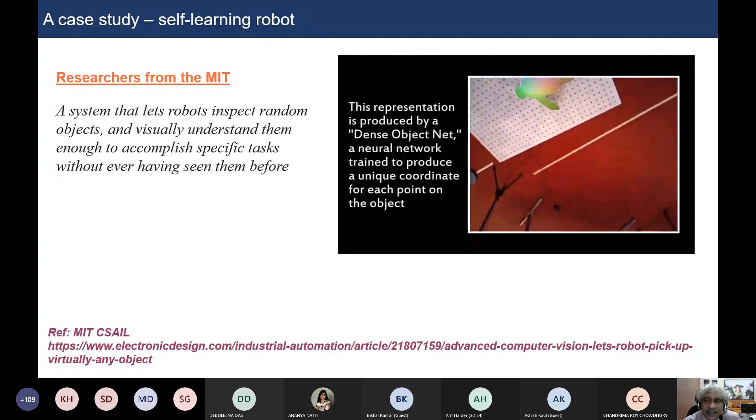We look at the self-learning robot. There is no program, nothing. The robot itself will understand how to do it. If different jobs are there, it will identify what to pick up and what to place. That is not programming, that is something learning - how different jobs are used. So different types of jobs are there, and it is picking up effectively.

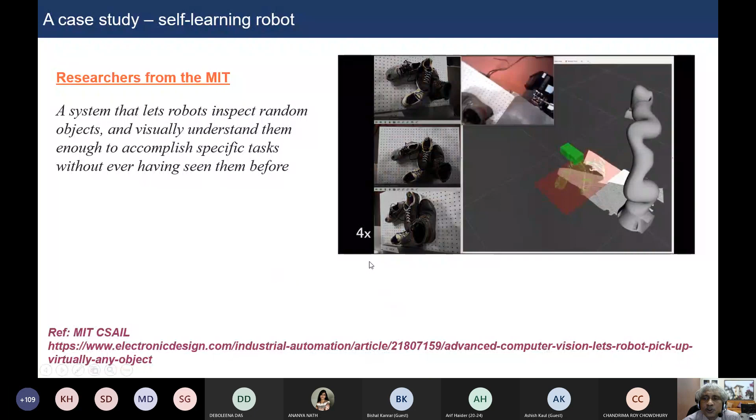That's why, if we can implement human behavior and human thought process, then we can have a better situation in the manufacturing domain, or in the AI models used in the manufacturing domain. This I have already explained.

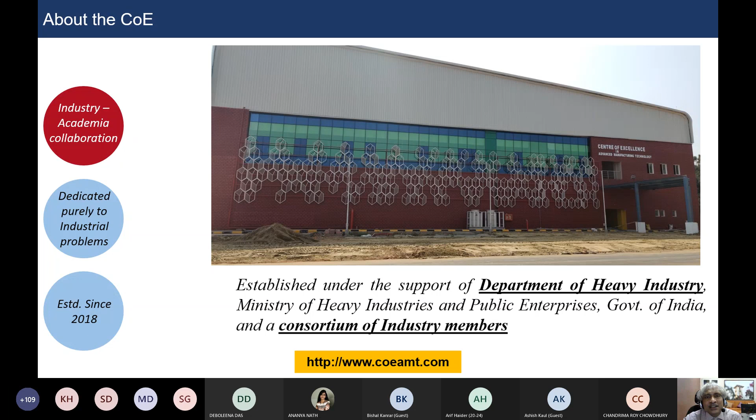I would like to introduce our Center of Excellence in Advanced Manufacturing. As already mentioned by your friend Deboleena, it is sponsored by the Department of Heavy Industry, and we also form a consortium of industries. It's purely an industry-academia research center. We do not talk about very fundamental academic problems here from the beginning. We take up industrial problems, try to solve them, and see what problems are there, how to tackle them, and if any fundamental problem is there, how to take it forward.

So we do have quite a few industries. You can see a large number of Tata Group members are there, public sector and private sector organizations. We do have the public sector as well, and we do have startups. This is a 40,000 square feet industrial shed constructed inside the campus of IIT Kharagpur.

The vision of this center is to work on modern concepts so that we can bring innovation into manufacturing systems. We can build ecosystems - you understand it is very much transdisciplinary, and also a very industrial-oriented problem, so we must work with the industry. We should not work in silos, like academic people and industry people, who generally move in parallel paths.

They never converge, but the time has come to work together, so the ecosystem has to be developed. For doing that, we need to work with international collaboration as well, and we are also doing that. We are giving training to industry people on different concepts, and whatever innovations we generate, we are filing as patents with the industry.

We are working with 4 thematic areas which grossly cover all aspects of manufacturing - material aspects, automation aspect, additive manufacturing, and Industry 4.0. Our faculty members, researchers, and interns are working on these industrial problems given by the original equipment manufacturers and providing solutions to them.

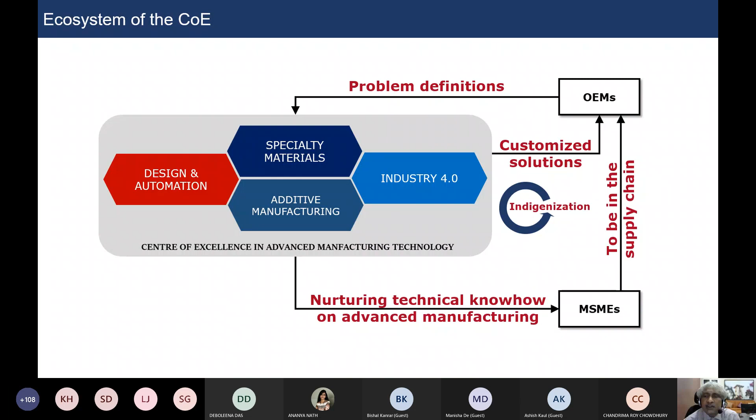We are giving training to industry people so that they know what new things are coming up and can be in the supply chain for the big industries, so that they can participate in the bidding process and all. So we would like to work as the catapult center.

That means taking up academic innovations and putting them into industrial practice. In most cases, academic institutions' innovations are restricted in TRL, technology readiness level, up to 3. And 7, 8, 9 is the industry's need. So there is a valley, and it is called the valley of death.

But we would like to work in this valley of death zone, because if something is developed at the fundamental level, the main problem is upscaling it, since they do not have facilities of industrial scale. The problem becomes even more complex when the fundamental prototype is getting converted to the real world dimension product.

But our facilities are all industrial scale, so that gives us a little bit of leverage to tackle industrial problems. We do have a facility on hybrid additive manufacturing, which would be able to tackle jobs of close to 1 meter length.

We're going to have a CT scan. Some facilities are already there, some are coming up. The CT scan is going to come up, which would be able to scan that large size of job, which would be printed or manufactured by some other means. We have a large number of CNC facilities, material characterization facilities, all very sophisticated and state of the art. We also have a very good welding facility.

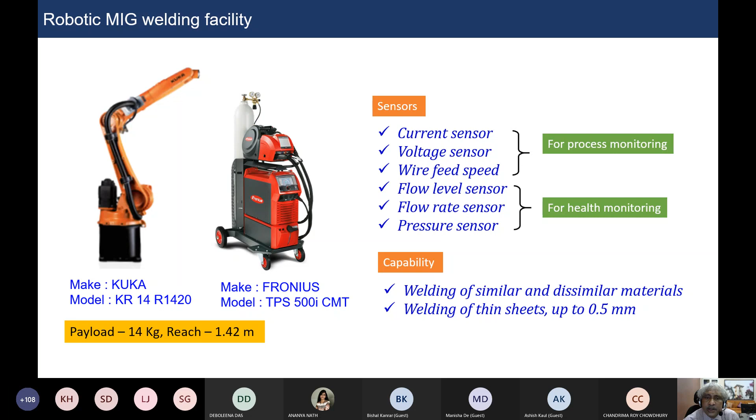If some industry is interested in welding, we are very confident in applying the AI/ML model there. We have a MIG welding facility, and you can see they are highly sensor integrated. So a large amount of data can be gathered during the process, and also to capture the health, we can develop the digital twin. We can also monitor the quality of the weld process.

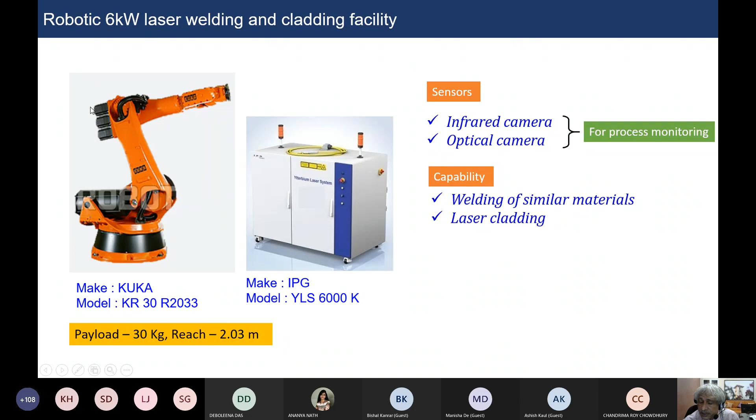We have robotic TIG welding facility, robotic spot welding facility, and we are going to have robotic MIG, TIG, spot welding installed, and robotic laser welding is going to get installed. We also have the job-fixed robotic welding facility.

We do have the foundry robots as well. And the most interesting facility, this vibration facility, was the first time in our country.

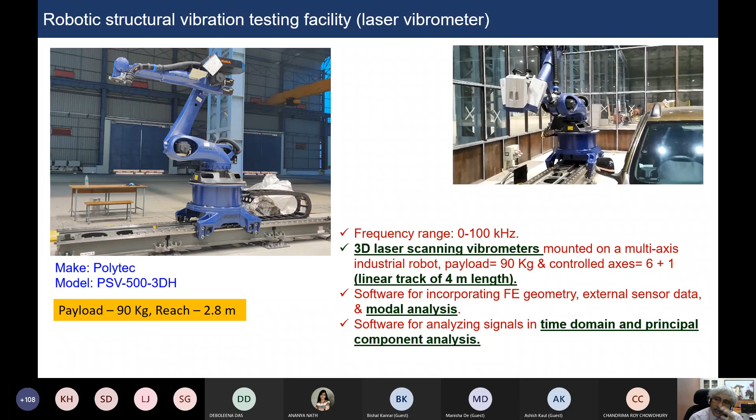When the robotic vibration testing facility was installed, I switched on my car's engine, and then tried to check what is the vibration level at different locations of the car by using the laser vibrometer. If someone is interested, we made effective usage of the lockdown period.

We came up with a book on digital twin. It covers signal processing and detailed analysis of signal processing, image processing, AI/ML models, and the digital twin. A large number of AI/ML models are discussed, with a lot of case studies in manufacturing, starting from drilling, then turning, then welding and all, even in additive manufacturing.

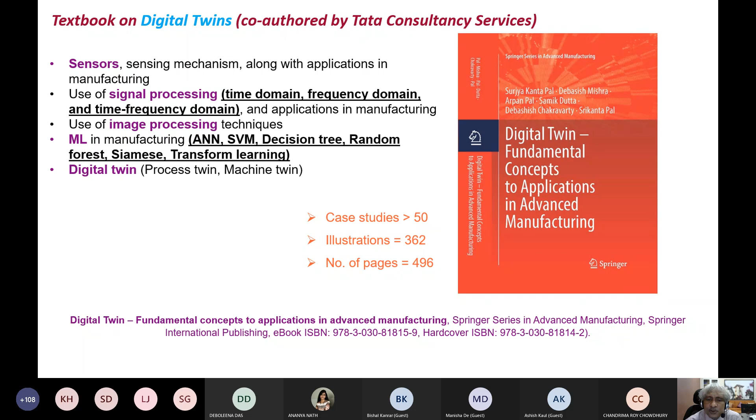So a lot of case studies are there. If you're interested, you can download that book and read it.

We are organizing the Saturday Manufacturing Talk. This started on 13th March 2021, and it's almost 6 months now, every Saturday at 8:30 p.m. We invite speakers from industry, renowned speakers from industry and academia, from India and outside India. One person talks every Saturday about modern concepts, their own understanding or views, or their research.

Next week's talk would be on digital twins. If someone is interested, you must attend. It's free of charge, no registration required, and you can attend at any point of time. We also have these seminars recorded, so if you are unable to see it live, you can also see the recorded video on YouTube.

As I mentioned, next week's talk would be on digital twins, and the speaker is the Chief Technology Officer of ANSYS, a big simulation company. Their Chief Technology Officer is fortunately our alumnus, so I requested him and he has kindly agreed. I believe it will be a very wonderful talk on digital twins.